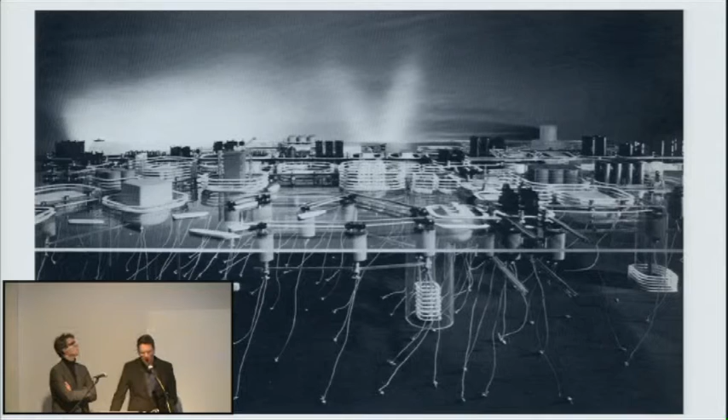So the argument we make with you tonight is that we need to find a way to discuss infrastructure from an architectural point of view, with an architectural language, taking cues from architectural traditions. In other words, not these kinds of models, which once more reduce the field of objects and the sea of suburbanization to networks, systems, invisible connections.

But definitely also not the work of our friends of Archigram, which reduces that residual collectivity or publicness that is still in our suburban infrastructures, squeezes it further until all that's left is linear fluids of speed. But instead, a project like this.

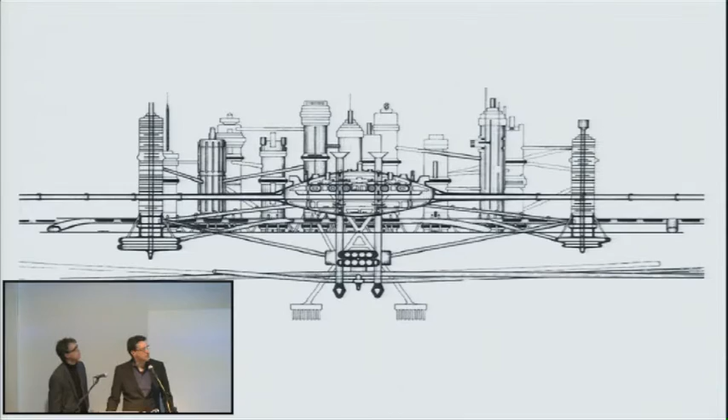This is Archigram's interchange, and this is an interchange, also a traffic interchange, designed by Hans Hollein in 1962. Now this, I would argue with you, is an example of an objectified infrastructure.

An infrastructure that does not seek to reinforce its own systematicness, its own continuity, but rather the fact that there are discontinuities, objecthoods, moments when the system comes to a standstill, and it's actually possible to clot something, to produce a form, an object, a space.

This was simply a theoretical investigation exhibited at the Richard Feigen Gallery in 1968, the project from 1962. It was exhibited in Chicago.

Now, Hollein was definitely not the only one trying to deal with the slowing down or with the objectification of infrastructure. In the realm of art, there have been, especially also recently, a series of interesting investigations.

This is Panamarenko with a design of a race car in concrete, one that obviously does not move. And this, most of you probably know, is Jean Tinguely with the artwork I think it's called Rhinoceros, a montage of dysfunctional, technocratic, leftover fossils and objects into a new kind of formation.

Okay, so that's in art, and that's all good and well. We all love art. So what about architecture?

So for now, we've identified three streams, let's say, endogenous to the architectural tradition, that are dealing with objectification of infrastructure. All three of them arrive, let's say, for the first time in late modernism, again at that moment in the 50s and the 60s.

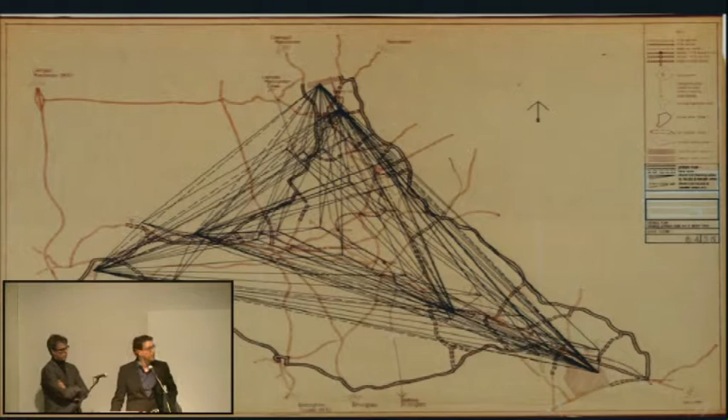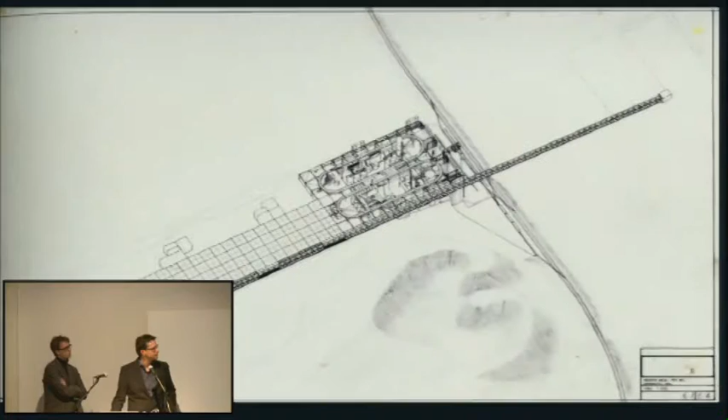So circulation and infrastructure are important, but what I want to talk about is the terminal station. Each of these 3 terminals are big boxes. The big box is not argued for from the viewpoint of market value engineering, but argued for from the viewpoint of internal flexibility and, in fact, the liberation of man.

What I mean is there's a utopian drive in projects like this, also in projects like Yona Friedman's open platforms, and in these platform buildings, where the complete openness of the interior, the complete lack of structure provided by the logic of this kind of building, allows you to appropriate it, to make it yours, to build your own universe within this. In other words, it's an architecture built for a freed human being, an architecture that is not a prison, but that frees up. That's the idea.

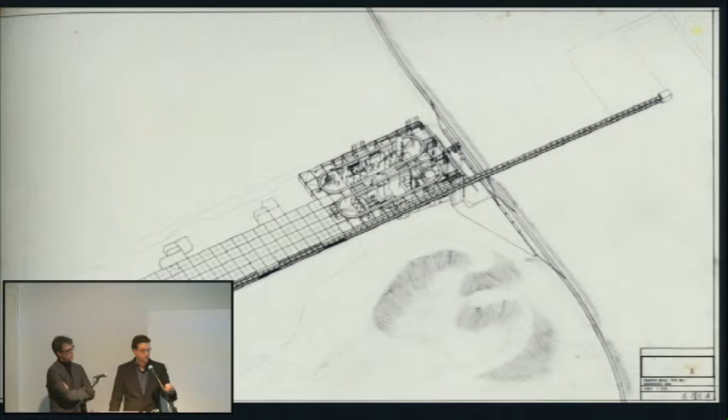So there is a tradition internal to architecture that wanted to use large, open, empty frames, not as a means for capitalist exchange, but as a means for internal liberation of the users.

This is a second project, or a second station. This is a third one. It's not important for us to go into details, but look at that. That's not a pyramid, that's basically a pile of earth from the coal mines you see dug up in the back.

So what you see here is a radical flattening, a horizontalization, a sort of eradication of three-dimensional expression, a building becoming really vast and almost commensurate with the scale of the suburban territory and its means of production itself. So rather than that De Stijl-type exercise of a Schroeder-like house, we evolve again to a flat plane, like painting, where the third dimension is simply abolished and all that's left is 2D, or at best 2.5D.

So, having identified 2 traditions about big box thinking—one idealistic, endogenous to architecture, the open platform ideal, and the other the vulgar market ideal—we asked, okay, let's see if we can build a box today in a suburban context and define with that a series of potentially interesting architectural encounters. So we're now going to show you one of the projects near Brussels.

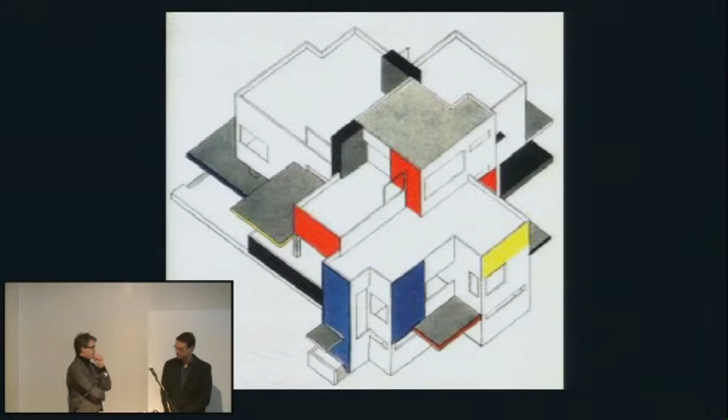This is the project we call ASCO, a town nearby Brussels, Asse, which lies on a main road. It's a medieval road linking Brussels to the coast—historical, and it goes through the town center. What's typical about those roads is that they already have a lot of sprawl buildings and sprawl objects along them, outside of the town centers themselves.

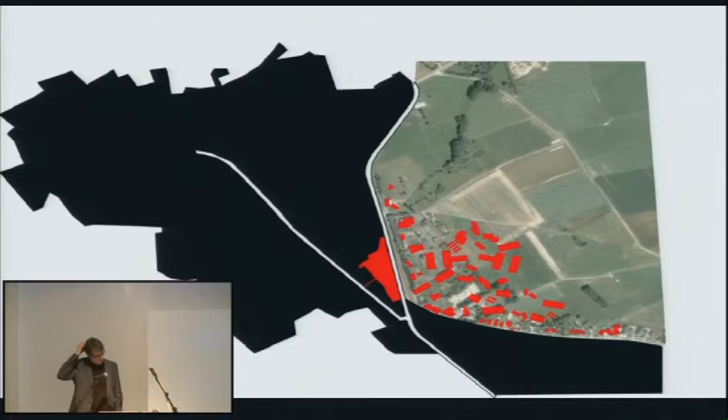In the master plan of the town, already built, is the start of a ring road going around the town center to make it more livable. The idea was: let's make a clear definition between the hardscape of the town center and the landscape. The landscape you need to imagine as agriculture, cultivated landscape, on the right hand, the green area.

The site itself was a former asphalt factory, a brownfield, and there was a serious rehabilitation program by which the town became owner of the site. It was convenient for them since they had to relocate some medium-scale programs outside of the center—so the program included a new youth center, a new fire station, a new police station, and they decided to put that exactly on that spot because it was owned by the town.

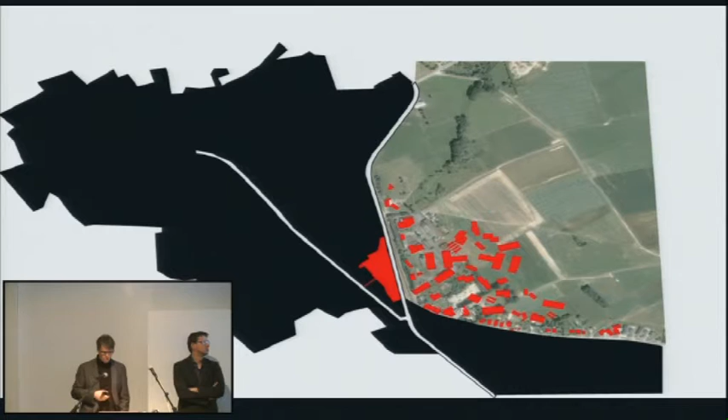The definition they gave by themselves was, in fact: okay, we need a building for the youth center, a building for the fire station, a building for that, and so on. So the risk, as you see here, was that we would create another sprawl into the landscape, and that's exactly what we think should be avoided.

So here was in fact the program that was asked by the town. And ORG suggested to combine all these programs, all these buildings, and to generate one generous building. It is like a linear building that is continuous going into the landscape. It is a very huge building, and the type that we found it appropriate to design with is of course the big box type to create this long structure.

As you can see, the parcels, we redefined it along this built form. By making this linear form, we introduced a new term, let's say. We call that the land form, as it is a form that overlays the landscape and could react on the scale of the landscape by itself. That also keeps view to the landscape possible. It is really like a suburban building into the landscape.

Here you see the form by itself. In fact, we as ORG were the urbanistic designer of the whole form, but it was in combination with another architectural firm that designed the youth center, which is situated here near to this ring road, and the police station, which will be built afterwards at the end there.

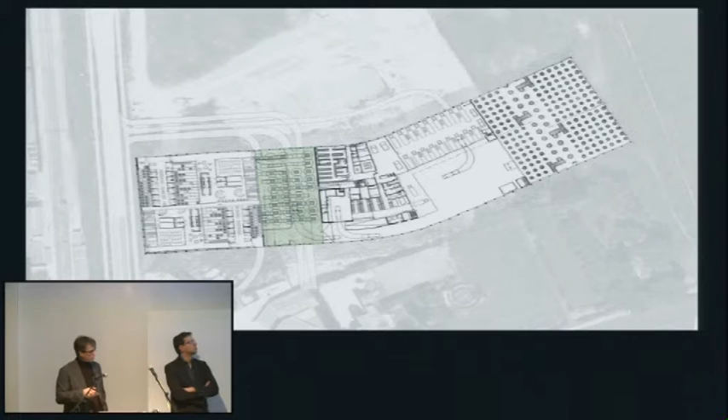And this is in fact what we call the public room, where we try to combine all the circulation that needs to go through the site. There will be a lot of sport fields also there, and there will be some commuter parking that will be situated on the other side. So there will be a lot of traffic, both motorized and slow traffic. But also the entrances, the front door of all the buildings, are situated to this public room.

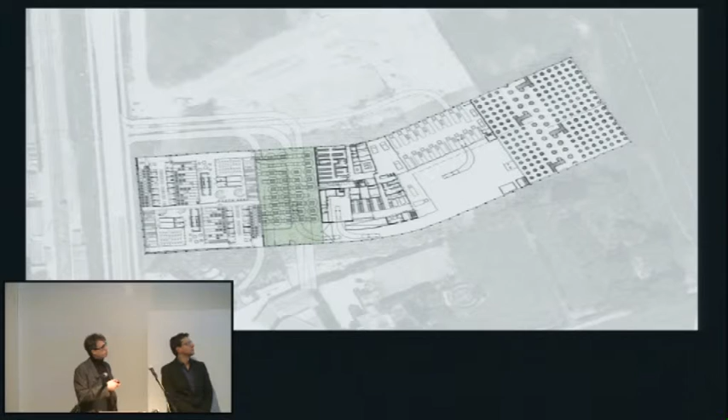Here you can see what will be the urban form, the land form, and what is typical. So we rethought a little bit the big box elements. I will show it also later. But in fact, to us the big box elements are the skeleton, like the columns, the beams, and of course the facade, the envelope that needs to be designed.

Very specifically here, the buildings themselves are like the structure, the beams and the columns, but the facade becomes an urbanistic element. It goes beyond the architectural element of the function itself. So the envelope becomes an urbanistic element. But it's also very important - that is the continuity of the landscape itself.

As you can see, it is here shown with the green parts. So we divide the buildings by public space just in between the program building itself.

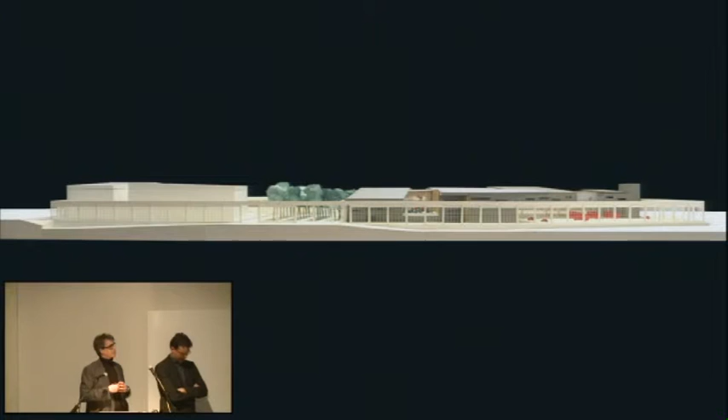Here was the first maquette. That was the first idea of the landform itself. As you can see, the landform could be endless. It can go endlessly into the landscape, and it creates a new linear town development of public program.

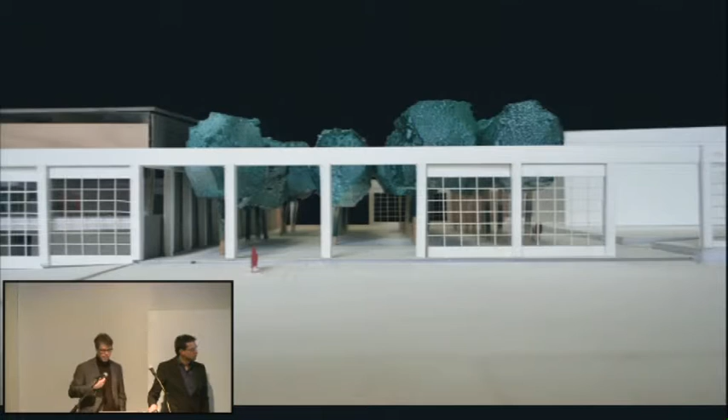What is also important, as you can see here, is a continuity through the landform. On the left side, you can see the gates of the fire station, like the big gates where all the fire trucks are situated. And here you can see the openness towards this public room, which has a continuity of the landscape, but on the inside of the landform, we create a separate universe.

The public landscape becomes really a public room and a space of civic activity. Here you can see it also, this continuity through the landform itself.

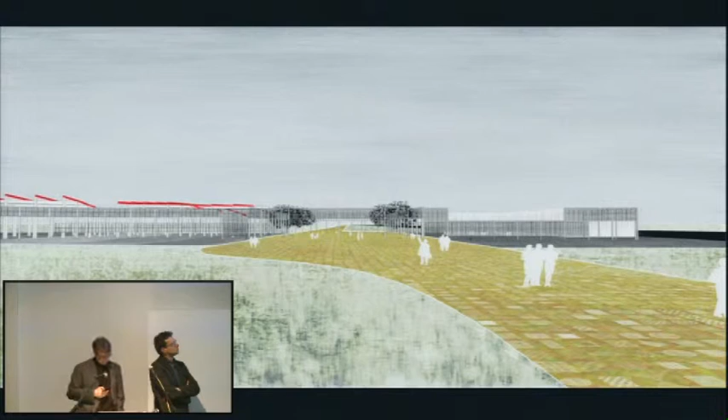So I already said it, this is the rethinking of some big box elements, skeleton, industrial beams. We put them together, we separate them also. We give them a separate identity and formal consciousness as separate elements. We also rotate them in a way. We put them a little bit further apart so that we can add other program, and that we can add daylight and so on into these boxes.

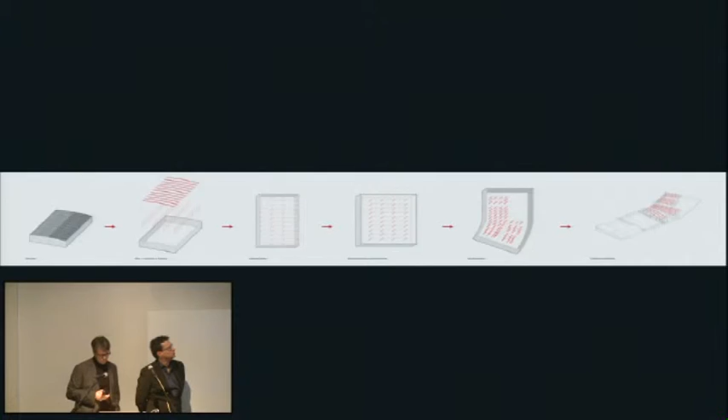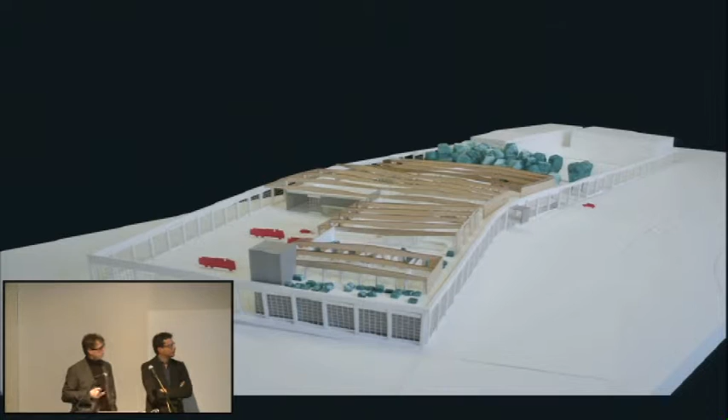Openness of the structure is very important.

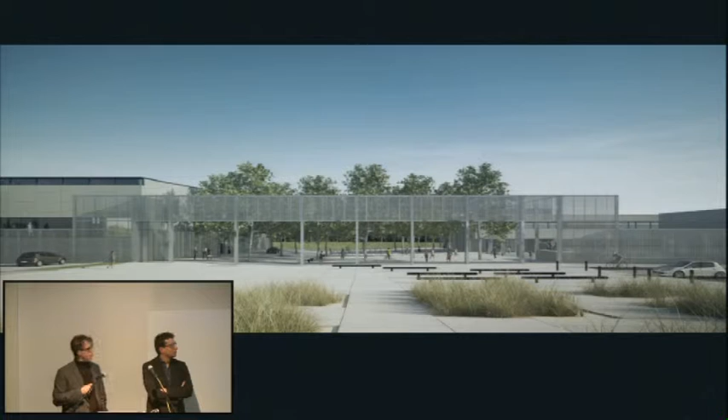And here you can see a montage of the rendering of this public room, with the continuity of the landscape.

Okay, thanks. All right, so we go into the second lineage, the universal building, Habraken and Hertzberger, the structural infill paradigm.

This area has a big market hall, a 100 by 100 meter roof structure, very spectacular. It currently has slaughterhouses, huge market spaces, and big parking lots. So it's a very open, empty, but quite programmed area.

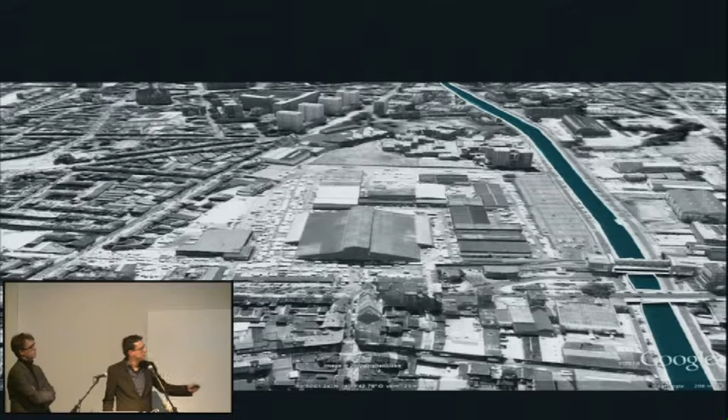Here you see again the site, the market building, and that whole emptiness—but emptiness that is vivaciously planned in with lots of markets, etc. That's a kind of experiential vibe here. And that's the basement level.

As you can see, this area, within the greater figure of Brussels, is really a figure of regional importance. If this is Brussels, here you have the European district, here you have the big church, and here you have the area of the Tour et Taxis, which is currently being redeveloped as one of the major office, park, and residential sites.

This site is on that big circular subway that defines the downtown, but while it has a functional charge, it doesn't have a form yet. It has a huge informal community, a big informal economy, but no form. And that's been our task: basically to give it a form.

To help you understand this plan, this is the drawing of the roof of the big market structure. What you see here is basically almost six identical buildings. That's the basic proposal of the master plan: six identical big buildings, about 70 by 100 meters, some even bigger, that simply sit around an emptiness, and by sitting there in the right way, define that emptiness—and that's all they ever do.

So what they do, by defining that space, is give form to the informal—that huge informal community of immigrants and relatively not-so-well-off people that populate this part of Brussels—all of a sudden get a form. They get a mirror to themselves, they get confronted with their own space, their own form, and their own role in the bigger regional community of Brussels today.

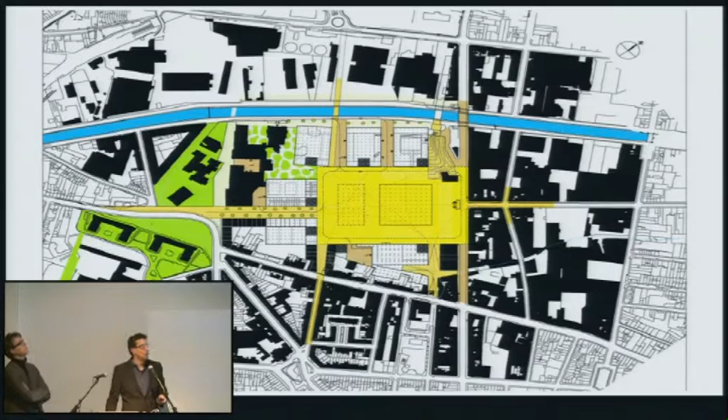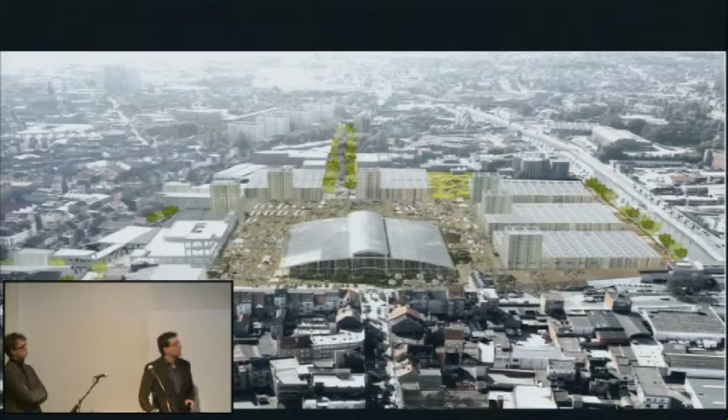Now I want to talk about the identity of these buildings, or more precisely the lack of identity. So here you have 1, 2, 3, 4, 5, 6—identical. This first one, which is the most complicated because it relates most closely to the fabric with different geometries and complexities, is the building we have a permit for. We hope to start construction of this very soon.

Here's the big open plaza. The idea of this project is that every one of these buildings is flexibly programmable—it's a bit like a big box, except urban, like a warehouse, an entrepôt. It has between 3 and 8 stories and can be filled flexibly with parking, markets, or residential. We actually propose that one of them has a compact urban version of a slaughterhouse. That way we propose an urbanization scheme that leaves all things possible.

So we plan with form, not with program.

And here you see again from a more close-up, also this historical building just needs to be renovated and it will be operational again.

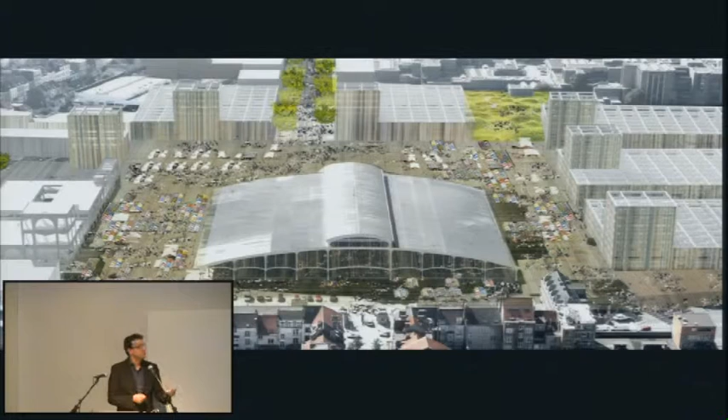We've been inspired, of course, also with the way the heights sometimes operate, by Louis Kahn and the series of citadels that he proposed for Philadelphia - simply building a sort of series of forts around an empty space as being enough to define where the center is. The idea that parking structures can be multifunctional, multi-programmable has now been proven.

So this was very helpful to make our case to the client.

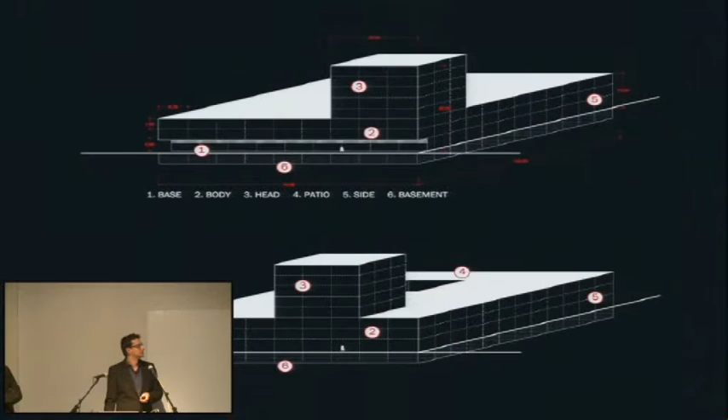And of course, there's a longer tradition of buildings without iconic identity - simply the value neutral, formally neutral warehouse that has a very clear facade. It's not undetermined, it's a very clear and rigorous facade, but it makes no identity statement. This is also what we're proposing.

This, in a sense, is an attempt - and now I get into one particular building - an attempt to rethink the structural infill paradigm. Hertzberger, Habraken, and many of these people proposed that buildings should not be thought of as pure objects, but, and this is a competition entry by Herman Hertzberger for the Town Hall of Amsterdam, rather as structures that are self-similar to the structure of the city.

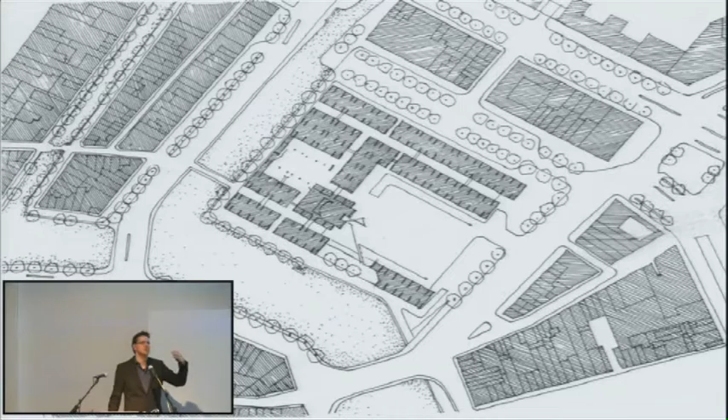Here you see these kind of concrete slabs, and whatever is inside those slabs, in principle, is open. It could be anything - a shop, a wedding ceremony, a bureaucrat, whatever you want.

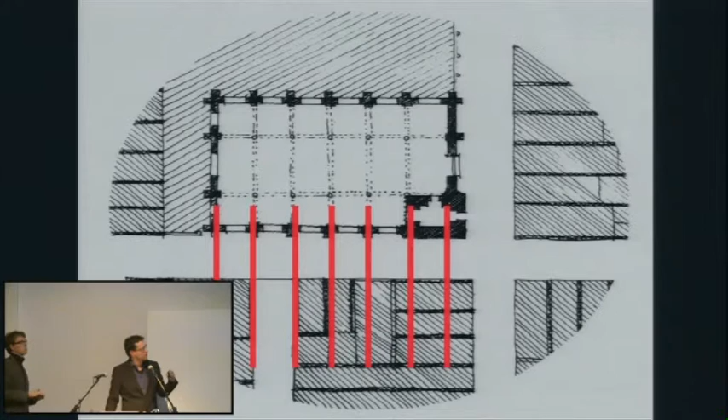Habraken goes further in his theorization to argue that these structures are structures that you find in the city, of which are dimensions, patterns, grains that are recurring that can be used.

This is the plan of this Amsterdam facility. There was actually no interior defined - it was just an open structure to be filled in.

Now, while this is a great idea - it really structured a lot of people in the 60s, 70s, and 80s - we've also seen the results in a number of these buildings and also the ways in which it went wrong. And one of the ways in which it went terribly wrong was detailing.

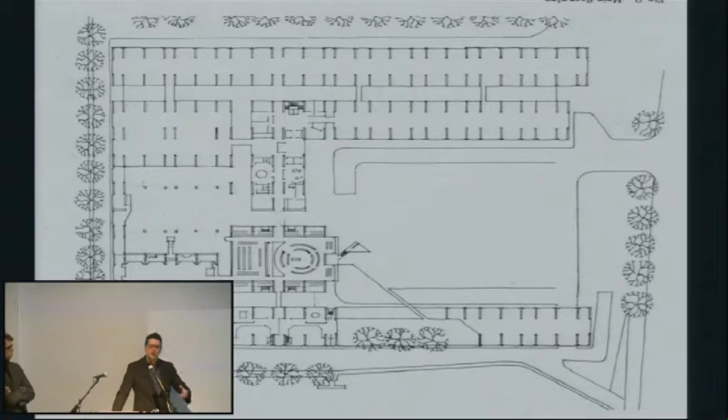But with detailing, I mean a broader problem: the assumption that there would be an operational budget to change the interior from time to time and rethink what would happen between those slabs, to have a sort of really organic living in that structure. Now there was no money to sustain that kind of organic living, so what you got was a pretty shitty detailed thing the first time around, and that then stayed in place for like the next 30 years, leading to buildings that were frankly not satisfying.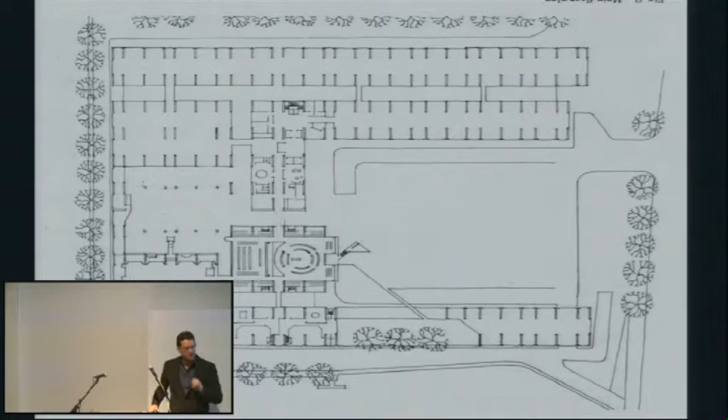One of the ideologies that also played a big role, especially with Habraken, was that the outside was not supposed to look like a building or like a strongly formed object with its own consciousness. Rather the opposite - the outside was to blend and become fabric with the rest of the city. So although there's a structural infill distinction, when it comes to the semantics and the architectural identity, presence, and self-consciousness of the building, what we have is absence.

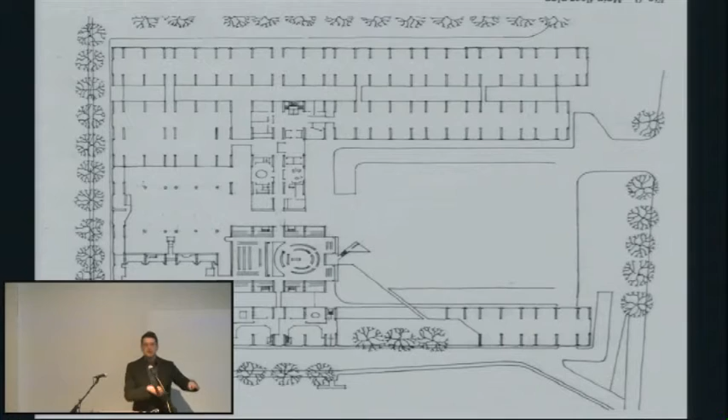The building, the structure, which is the permanent feature, hides into the interior, and some kind of temporary infill, self-expression of the users, whatever, defines the perimeter. This is what we propose to change.

So, there are a number of attempts within structural infill that actually gave attention to the facade and said, let's do structural infill, but let's put the structure in the facade and make it a very permanent defining feature, keep all that infill and all that openness and flexibility, but not in the facade. So rather than an ideology of self-expression, in the elevation you go to an ideology of fixed civic form. And that's the one we've been going with.

Here you see the project by Stirling.

And this is the project that we're now building in Brussels, the first one. It's basically one of those 70 by 100 meter buildings that I showed you in the master plan, but it's been opened up, it's been diverted to have this kind of vortex effect. Luke will explain some basic principles of this building. This is the building that is also in building permit, and we hope to build it by May, June, something like that.

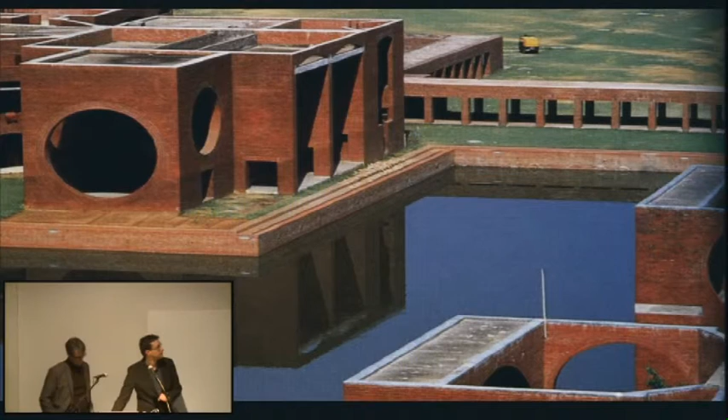Okay, of course, inspirations that I didn't mention, but that are outside of the Hertzberger Habraken realm are Louis Kahn, clearly.

The idea of structure. What is important here is that what Kahn does is also basically turn structure into a surface. So rather than having a beam and a column, which is what the big box does, he actually tries to surface it. So you get a big panel in which you cut a hole. It totally changes the representation and the dynamics of the building. And this is something we took a cue from in trying to transform the Hertzberger problem to current times.

All right, so look. Okay, thank you.

As Alexander was saying, we had the ambition, and the client also has the ambition, that next to the monument, we try to see these urban warehouses, we try to see them also as new monuments. And how are we going to produce new monumentality? So that was an idea of, okay, the search: what is in fact the permanent layer of a building? Because if you say, okay, you want to create a monument, it has some permanency.

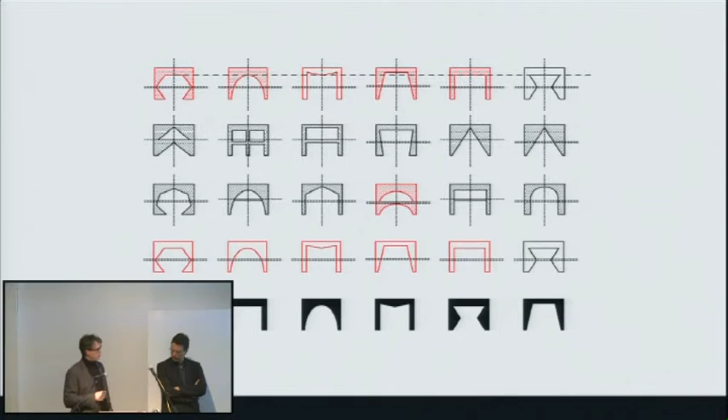And so if you look to the building, which is these different layers, it's like the permanent layer, let's say the infill, which is certainly not permanent. But the structure is certainly the permanent layer of a building, and that's what we try to do. We did some iterations of how this structure could work and how this structure could give really expression to the building, so that the architectural identity and presence of the building could be shown in the permanent layer.

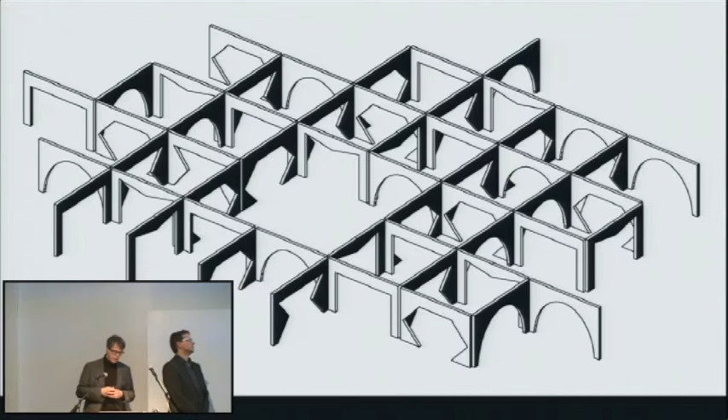And then we came with the Platonic panel, we call it. It's a panel. We searched a little bit on the dimensions of the panel, how they could work structurally. It's a panel of 8.5 by 8.5 by 8.5 height, so it gives us a cubic form. And those rooms, they can receive 2 or 3 stories depending on what the activity is.

These inner stories, in our opinion, are not a permanent layer. But those rooms can receive any program. In fact, they could become a parking spot. So if you would try to figure parkings in, it can work very well on that dimension. It could receive housing, it could receive gardens, and even streets and shops.

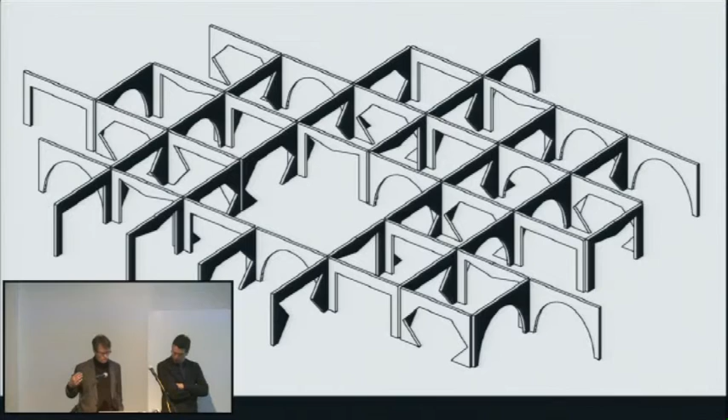And this structure is not like an endless going-on system, because when you stop it, when you end the system, it gives a formal definition, and so the system becomes really a formal object, by making clear distinctions with the facades.

This was an installation with series of mock-ups at a third of the scale, so you could walk through it. And this is an installation that was made at MIT, and we called it the Hommage to Habraken.

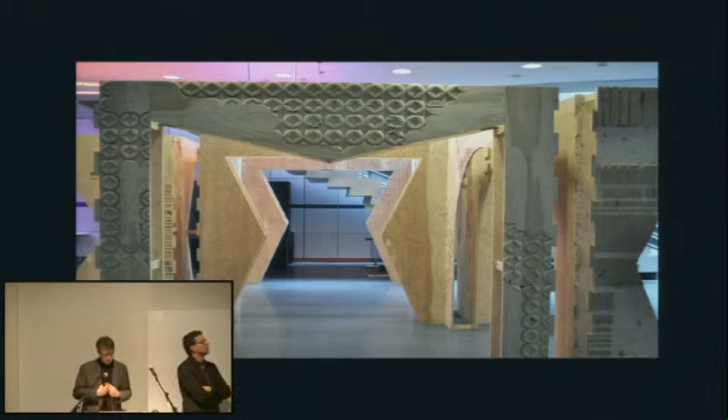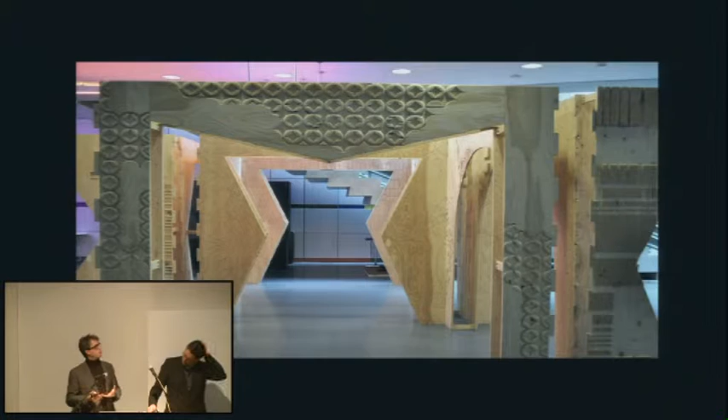What is also part of this exercise that the platform made there was, okay, Habraken said that the expression of the communities and constituencies that populate the project make the facades. Well, here it is in fact, okay, we can do that with ornament on the structures, and so the ornament is printed on the structure, but the structure by itself gives its formal identity.

Here you can see the omnipotentials of this structural thing. You can imagine anything happening in these structures. So we have in fact a street. You can see the truck here. So you can have streets, you can have shops, you can have gardens. Practically everything is possible. Of course, you need to think that it could be open or it could be closed, and that is of course the thing that you have to manage with daylight and so on.

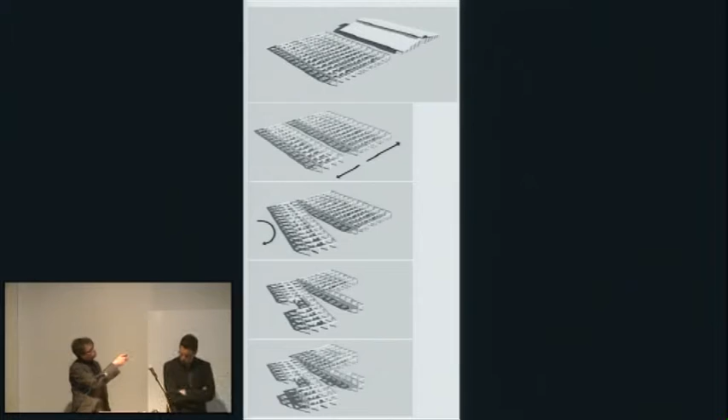And what is this iteration that Alexander was talking about? That is, of course, the principle that we started with: we create a copy of the monument, which was 100 by 100 meters, and we opened it, and then we rotated a leg, and this is all to meet, in fact, the existing urban fabric. Then also there are some existing buildings that we needed to integrate, and that, of course, are iterations that we need to take into consideration. We stacked also some other stories on it, also to meet the urban regulation.

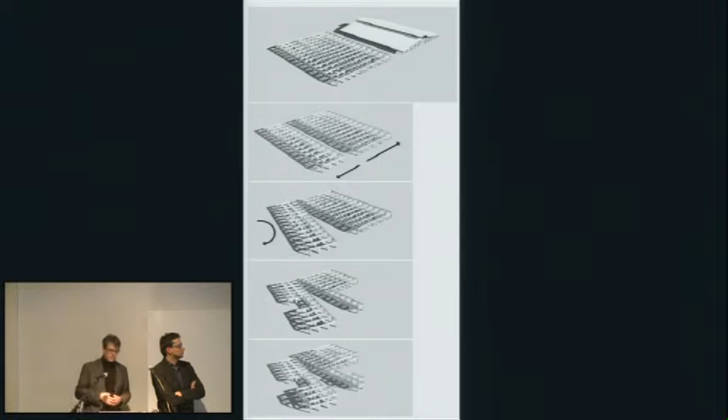And here you can see the project, without the roof. On the right hand you see the monument, the 19th century monument. On the left side you can see the urban fabric, and in the middle is the project.

In the first stage it will be a market building, but this program can evolve. You can imagine other public functions, but we also made the exercise to integrate parkings into it, and housing, as you can see with the openness of the structure there. So these iterations are made on these structures.

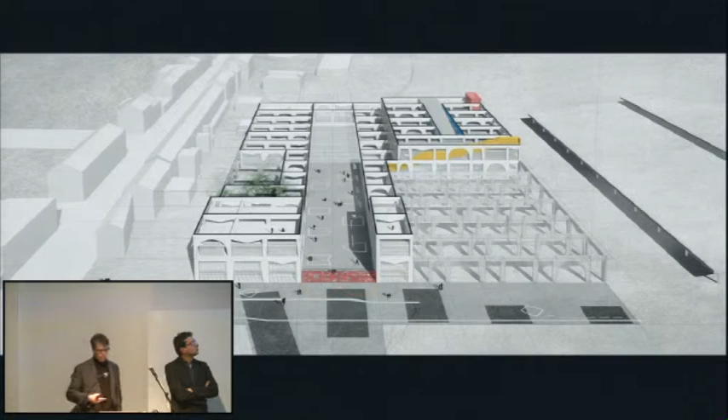Here's an image of this new entrance to the market.

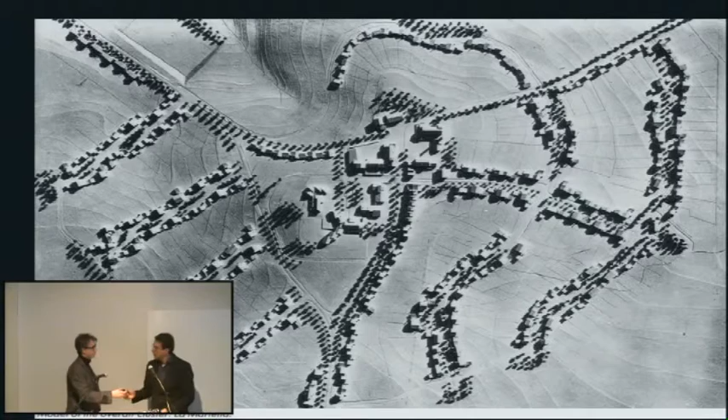Now, for the third and last strand of our conversation, the one that is in a sense the most trite, the megastructure. I want to present a project that is a large-scale study we did for the coastline between the Netherlands, Belgium, and France. It's a kind of realistic study, done with engineers, hydrologists, people with a realistic sense of expertise in this field.

The big problem is that this was a design on a scale of 68 kilometers. It's extremely long — the curvature of the Earth is very active at that scale. So to think simply in terms of objectified infrastructures becomes complex, not easy. So we went back to infrastructural, megastructural thinking, to see what kind of mistakes were made, or what approaches existed that could be relevant.

One of them is in the work of Ludovico Quaroni, a progressive modernist Italian architect of the post-war period. I'll show a few projects of his, chronologically, to illustrate a relation between building, infrastructure, and landscape in his work, and how that relation became ever more contrived.

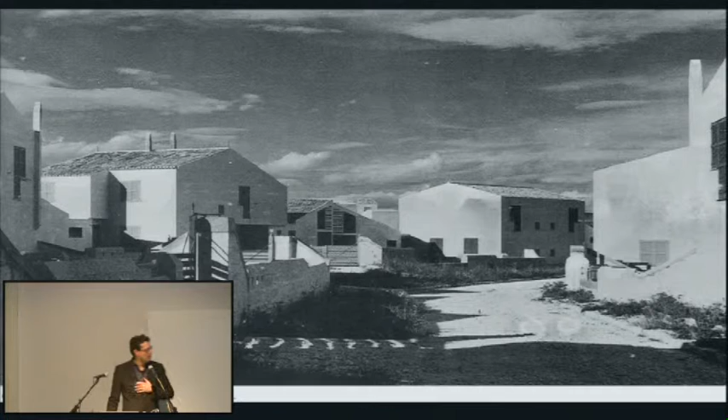So there are definitely abstract, modernist, large-scale desires at work here, but also very muted, in a sense mature, although it was junior work. As you go through further work — this was the early 50s, now the early 60s — you see a project for a coastal resort, where things become more and more identical.

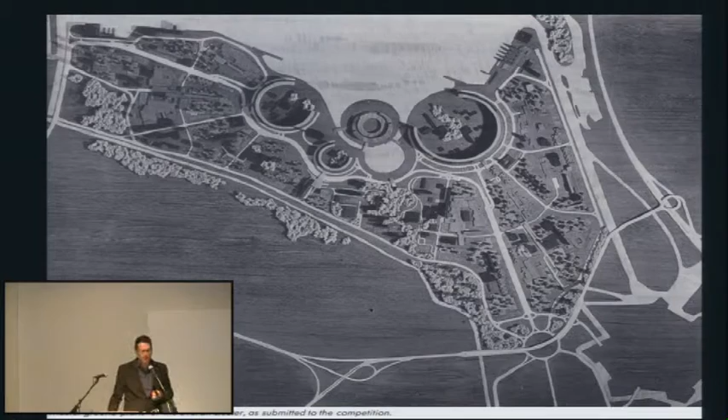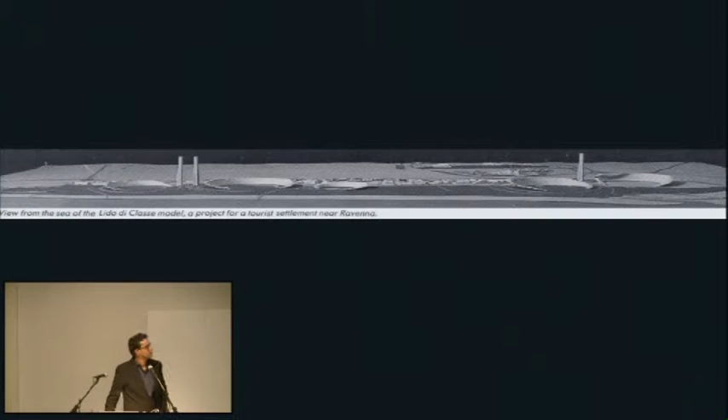Just a huge circular building that is one megaform, with a road around it in exactly the same proportion, a water body sculpted around it with exactly the same formal apparatus — the identification of all the different tools in our instrumentarium to one geometrical recipe. In a sense this is too bad — not that it's a bad project, it's amazing — but there is a gradual impoverishment occurring.

Now, the scale of construction of this kind of big feat of man is such that you need to build time into the procedure of the form almost. It's otherwise hard to realize, and that didn't happen.

But strangely, something funny happens in pictures like this one, where what still seems like a script for a B movie, some kind of Star Trek scenography, all of a sudden, if you squint your eyes, starts to hold the middle ground between a Star Trek scenario on one hand, and a Piranesi drawing on the other.

In this drawing, the forms start to break up into separate pieces, each with its own internal constitution, relatively close to each other, but also seemingly independent. Maybe it's just a play of shadows, but somehow this picture of the model was much more convincing than that one, because somehow the glue between the elements has disappeared.

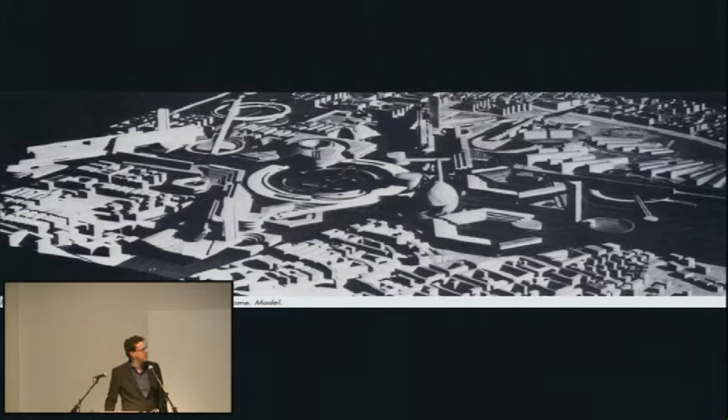So the project for the coast will take up some of these issues and try to find a residual place for architecture, a very ambitious scale of architecture, but nevertheless one that finds its place in an overall scale of megastructural thinking.

This is a typical picture of the Belgian coastline, could be northern France, southern Holland, doesn't matter, it's all like that. And this is the territorial waters of, well, in particular, the Belgian coast. By the way, this was a funded study. Arcadis, IMDC, and AT&M were consulting firms that provided engineering expertise, and we acted as the designers.

As you can see, it's an incredibly intensely, industrially exploited piece of water. There's many channels, dredging, shipping, depositing of minerals and soil. There's contaminated ground, there's many pipes. And that big purple thing you see up there is a whole planned series of windmills, about 15 kilometers out.

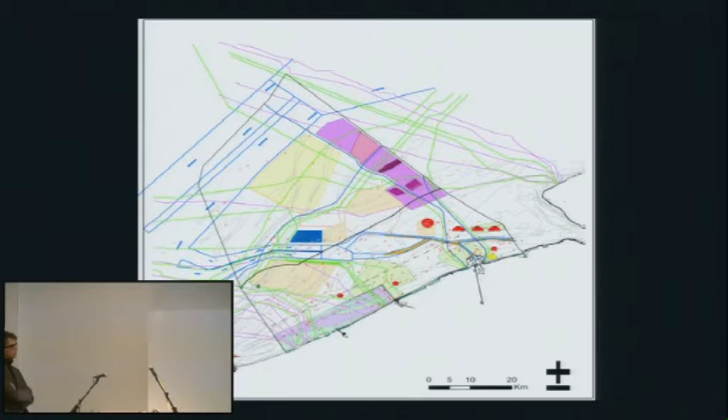So this is just as a matter of scale. This is 20 kilometers. This is about 60 kilometers overall, from border to border.

Now, many issues are facing the Belgian coast. One of them is overdevelopment. These are just nightmare shots of what might happen if nothing occurs. There's an enormous development pressure.

It's an area with an interesting cultural heritage. Many surrealist and modernist artists lived and stayed at the coast and produced their main oeuvre there. This is James Ensor, with many drawings and pictures of coastal life and the absurdity of it, coastal tourism in the 19th century. Léon Spilliaert, a painting that I just really love because I'm thinking back about the big boxes, the extreme horizontality, that actually is here part of the topography.

A huge task for blue energy in the future. And so this is a sketch of a likely scenario. What you see here is the territorial waters. What is even more important in the distinctions of blue is you see a system of sandbanks, which have a very clear morphological, formal structure.

It goes like this, all the way out until basically into the middle of the channel. It's a formal structure that we can use. We should take advantage of it, and we did. And in a sense...

To contextualize this discussion, if you think about the Palm in Dubai as really a megastructure, as a system where infrastructure, buildings, and landscape forms have been aligned exactly in that way that we learned was rigid and ultimately dysfunctional in the later work of Quaroni, then this is the opposite. I mean, this is the anti-Dubai.

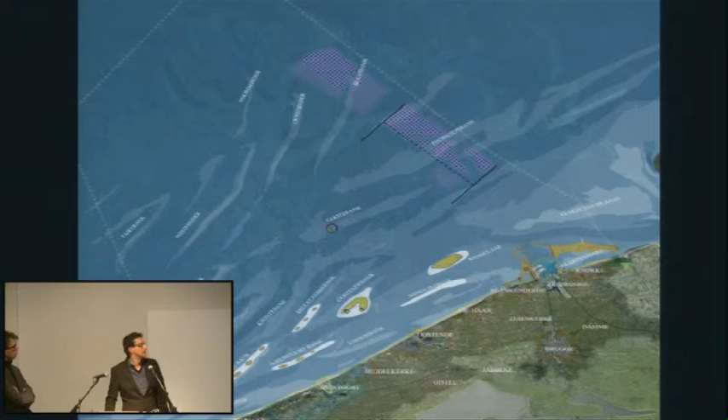There are very clear formal principles at work, but they overlap and they make choices. For instance, a linear morphology of banks that gradually will grow and will be heightened to become strips of land at low tide and just an archipelago at high tide.

In a sense, this is nothing new. The historical structure of the coast was never as cleanly linear as it is today. It used to be, you can see many islands, flats, those are little at low tide, with little settlements on them, medieval settlements, whether it's monasteries or small fishing villages.

This is the structure of the land in Roman time. This is the current coastline. And actually, as you can see, the current coastline has retreated from the one that people estimated was there in Roman times.

So this project, on the one hand, creates form by gradually accumulating sand dredged out from the harbor in selected sandbanks that over time then become land. But this land, frankly, is very flexible. It's shifting land. It's part of a natural ecosystem. It's not architecture, it's landscape.

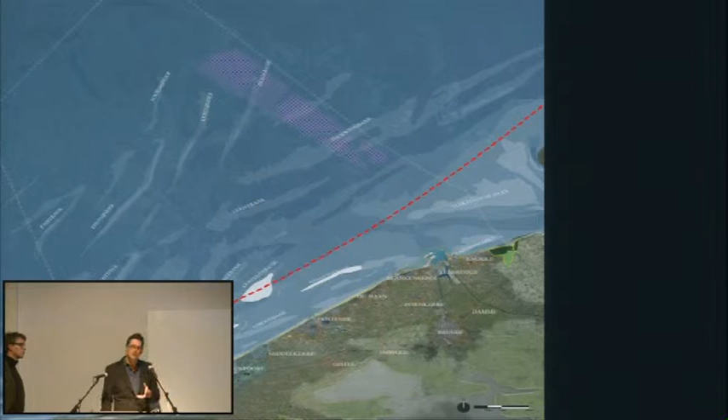And this is where our conversation again becomes important. That's the kind of land you get. It's very dynamic. There's nothing wrong with it. It's not particularly architectural. Where is there any task for architecture left in this kind of scale of formations?

And we think that there is. And so we've developed a system of drums, big concrete drums with a diameter of about 300 meters, which is the equivalent scale of a village, a historical village. But it's built with a technique of oil rigs. Right? And so like an oil rig, you sink it.

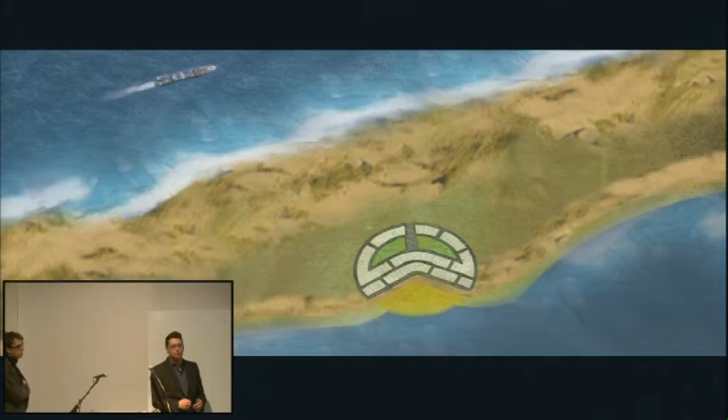This sand is very dynamic, shifting, changing. But the oil rig that you sink in, that's a permanent structure. Inside of that, you can develop. And for reasons that have to do with gravity, dynamicness of the land, and just erosion, it's actually impossible to have sprawl here. Well, you can't develop here.

It's just not possible. So we can make a national park on the North Sea that is 99% natural, and that here and there has these punctured interventions, these villages, that allow you to actually see that national park.

Finally, one very important aspect of this project is that there's a primary function, which is national defense. Once a 5,000 year storm hits the coast, with sea level rises, currently that part of Belgium behind the coastline is very flat and lower than sea level, so it will be an economic and human tragedy. So we need a defense belt.

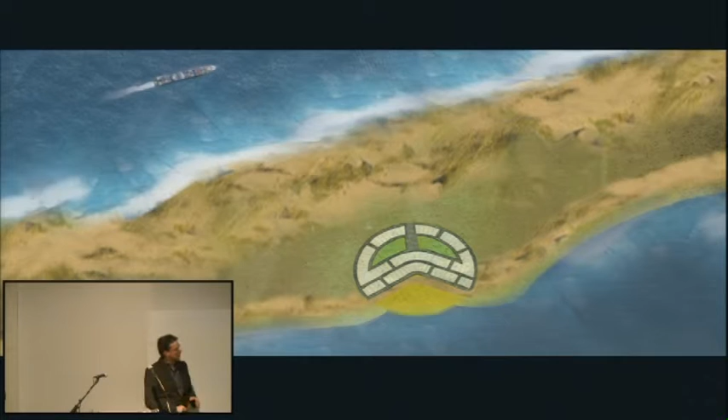And just like the Dutch are doing, this defense belt is more soft in nature. There were many conversations with the Delta Commission, or the Delta Works in Holland. And in this project, ultimately, the softness is the savior, but also it's a destructive protection of the mainland. What I mean is, when the big storm hits, the island gets destroyed, but the mainland is saved.

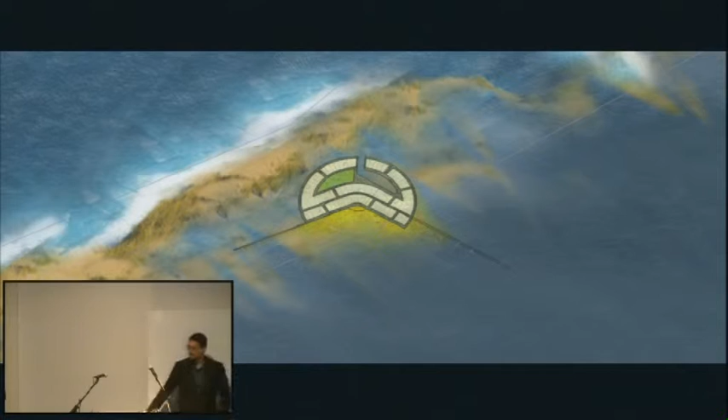So the big storm hits, and nature withers. But you know what? Architecture stays. And so even as, gradually, with ever rising sea levels, this land becomes more and more tenuous, and suffers pounding after pounding, the drums will actually maintain. Nature may change forever, but architecture can be permanent.

So we developed one of these islands in more detail, and this is one part of the story. Now, how should any kinds of these settlements be located? Is there a way to operationalize a kind of miniature settlement program across a fake coastline? Yes, there is, and it's with central place theory, a geographical analysis tool developed in the first half of the 20th century by German geographers such as Christaller and Lösch, drawings like this.

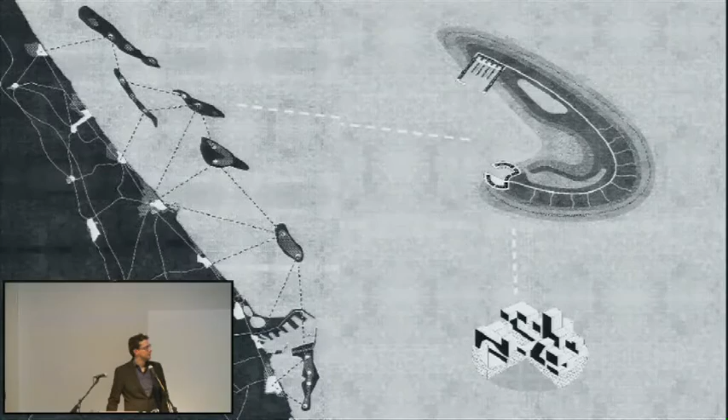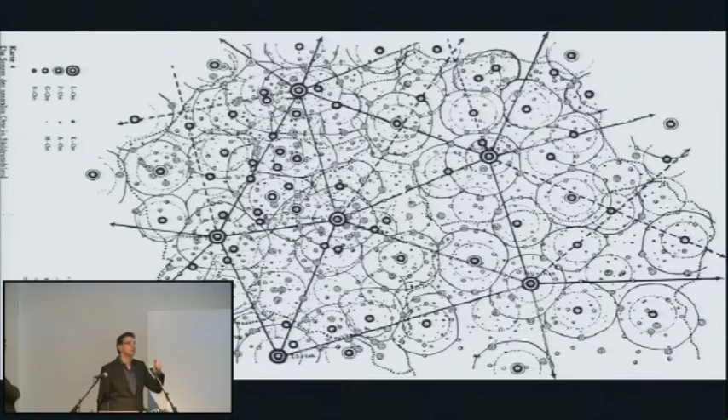Now, given the fact that this geometrically pure model can be detected in almost any proto-capitalist society, the distances of the towns, in many cases medieval towns, is based on travel distance to markets. So it's basically a proto-capitalist, market-oriented way of understanding settlement, which is consistent with the origination of many of these settlements. It also explains, not just in southern Germany but also in Korea and many other countries around the world, the formation of villages, again in proto-capitalist societies, also in Flanders.

So this is the Belgian coastline, and we rotate it, flip it back, and then do a kind of Christaller-Lösch mapping of the very small villages at this scale, and then simply try to extrapolate the pattern, the triangulation system. So we operationalize central place theory on the other side, in the water, and from that derive the potential locations of these villages, or dorps.

By the way, we have 3 scales covered here, and this is really critical in the work. At each scale, its own intelligence level is required. You cannot just operate across the scale with one tool. There is a big form, the morphology of the sandbanks. Another part is the triangulation system that it sends. And then it articulates itself clearly at the level of a single island, and finally within the dorp, a whole other level of architectural investigation is opened up.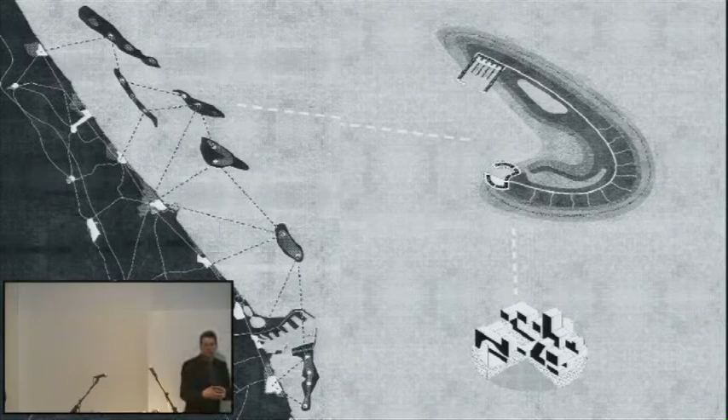So there's the level of the coastline as a whole, the individual island with the drums, you see 2 drums on that one, and the architecture of a single drum. Okay, these are examples of the 3 strands.

We've almost, I mean, I don't know if you're out of time. We have one more project, just a short one about objectification. Is that okay?

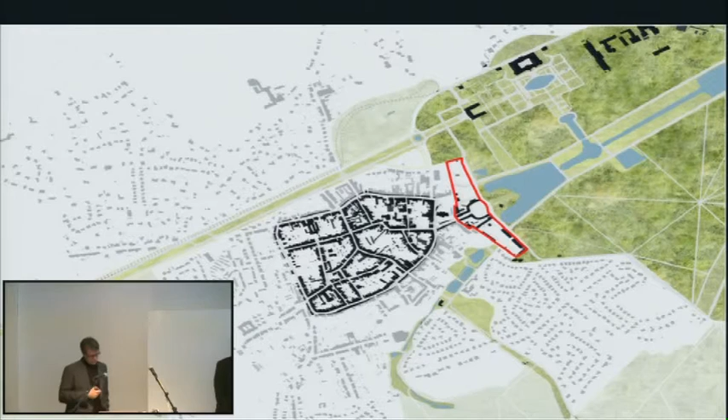This is also a nearby town of Brussels. It's a very interesting town, as you have a medieval city center, and here you see a huge formal design of the early 20th century, which is a royal park with a 19th century huge museum, a royal palace. And here you see the big avenue connecting this town with Brussels.

It was one of those large urbanistic works to put Brussels on the world map at that time. The thing is, there is a problematic situation with the connection between the form of the park, the larger scale of the park, and the medieval scale of the town center, because during the 20th century this became an overflow of functions like a parking spot.

They put some football fields there, and some communal ateliers were put in that area. But they had the potential to be a very strong connecting element, because that was exactly the purpose of the study that we've done.

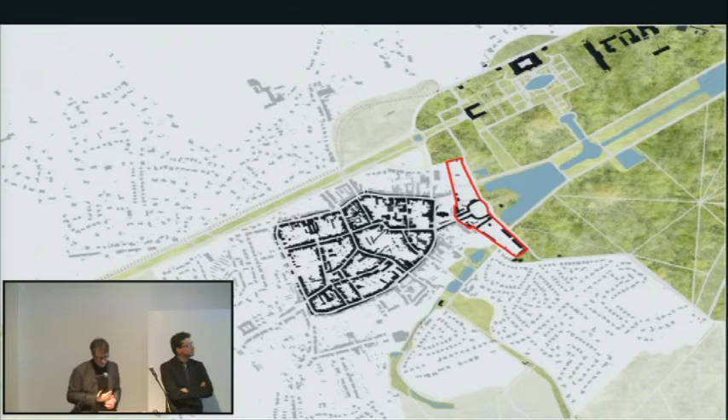The competition was actually about the north wing - so the double wing here, you see this army barracks. And you already had a formal structure, which was the ancient royal botanical gardens.

At some point in history they were organized as a French garden - you can see it, a French garden with parceling and corridors in between. And this was already a figure with a certain autonomy, which is very interesting, since the site is still called Botanical Garden. So the name remained, but once they put in those overflow functions, there was nothing left of it.

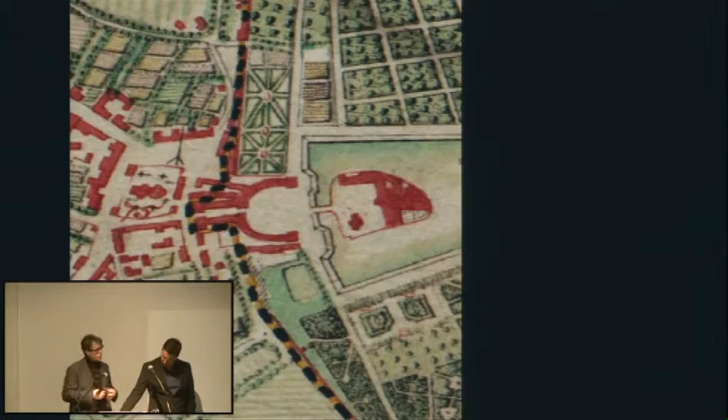The only thing left was a surrounding wall, which was already there around the botanical garden, and it needed to be kept and protected. Here you can see this figure, of which a large part is this existing wall, an element that needed to be kept.

And the main strategy was how can we make this zone very transparent, and how can we tie all these elements together.

Here you can see the overview of the project that we proposed. Here you see this army barracks, on the lower side the park, and there the plaza of the medieval center with the church. In fact, there were three parts to it.

They wanted to realize a lot of public program - here a new cultural center, here the new town hall, and here a third, a museum they wanted to add. So it's a lot of public program they wanted to add there.

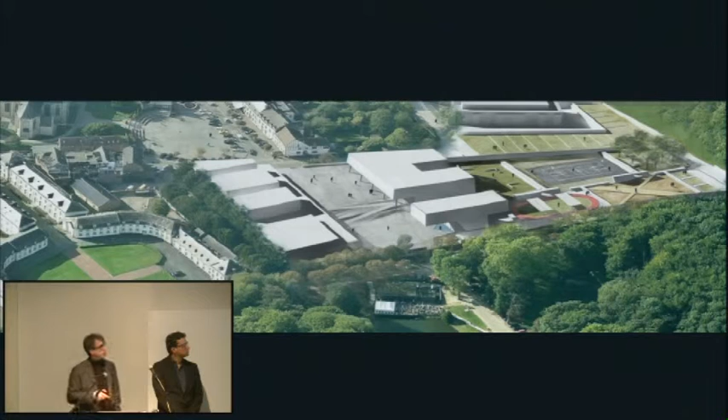And this is a new connection - there's a big height difference you need to make there, but they really wanted a very good connection between the plaza and the park. And then there was also a recreational garden, one of the programs where building was not allowed.

Here you see the overview of the park. You can see the historical wall that goes around the botanical garden, and we added this wing figure as a strategy to organize the whole zone, including the southern wing.

Here you see the historical plaza, which needs to connect with this new esplanade to the park, and here you have the slight openings into the existing wall, and then the recreational zone that you can find there. We suggested a formal strategy applied to this recreational garden, using T-shaped wall elements that divide public rooms within these recreational gardens.

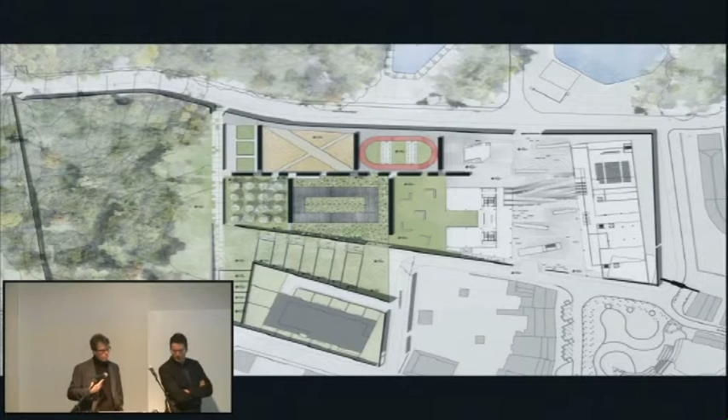It is in fact a rethinking of the botanical garden, in which you had rooms separated by corridors. Here we inverse it, making the separation with formal walls. This is the infrastructure of the garden, by which you can force people not to walk in the corridors overlooking the rooms. No, people need to be part of the rooms. So by making these elements, people will walk into the rooms themselves.

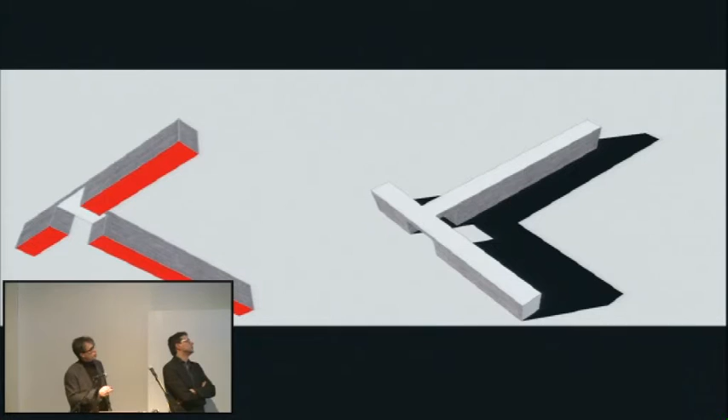They each have their own landscape design and own function. This is the T-shaped object wall, and in the knuckle we foresee openings so that you can walk from one room to another. They also have different heights, which has to do with the topography of the site, which is sloped.

And here you can see the separation of this recreational garden.

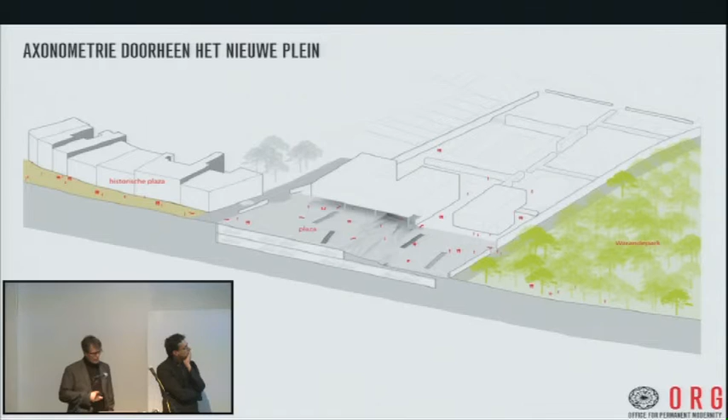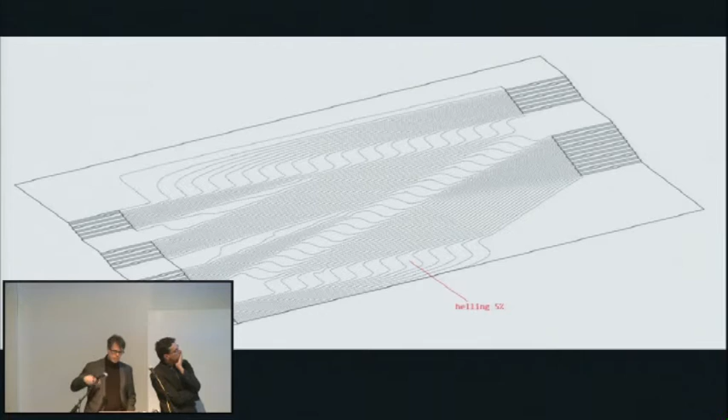Then the plaza itself, we tried to make it a very sober element by which we want to connect the plaza, the ancient plaza, with the park. We use a ramp element, as you can see here, with a slope of 5%, and near the buildings it goes over into a real staircase, maintaining this continuity of the public space.

And here you can see the square itself, the new esplanade, where we also repeated those T-shaped elements. As you can see, benches are used like that. The draining system will be like that, and also the light fixtures will be these T elements.

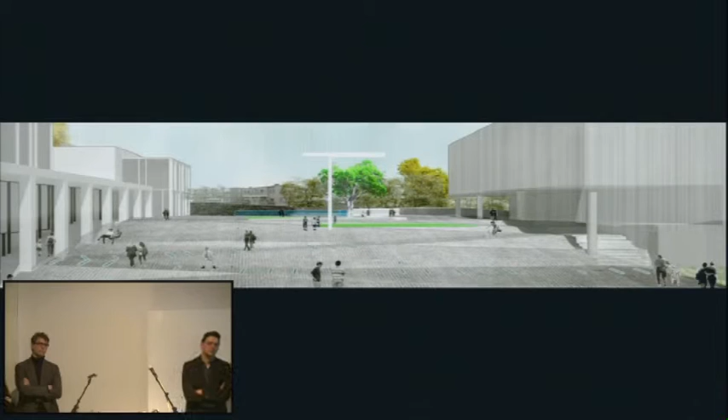First of all, thank you very much for the lecture, for sharing with us your experience. It is really refreshing to see some architectural strategies of dealing with bigness, not just programmatic ones as we used to. It seems to me that in your examples you are showing how we can deal with bigness as a single entity, as an object. But you don't really show an example of a pattern generating a healthy urban fabric, of how you group those big forms into a sustainable fabric. What is your view, going back to peripheral environments where we need some kind of logic for bigger systems? Do you believe in the potential of those fabrics?